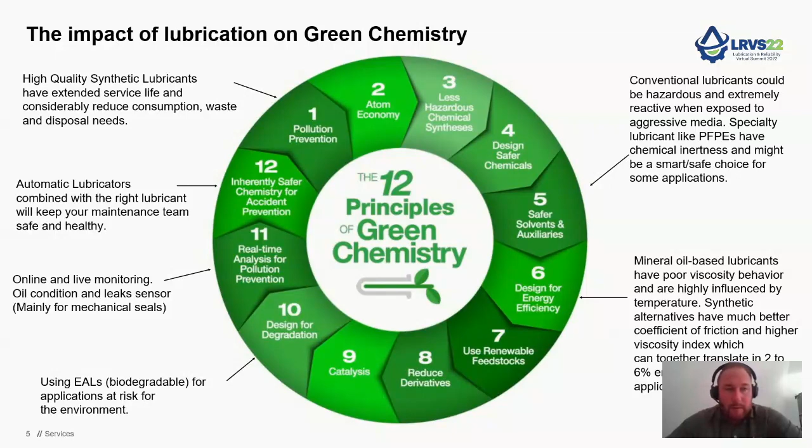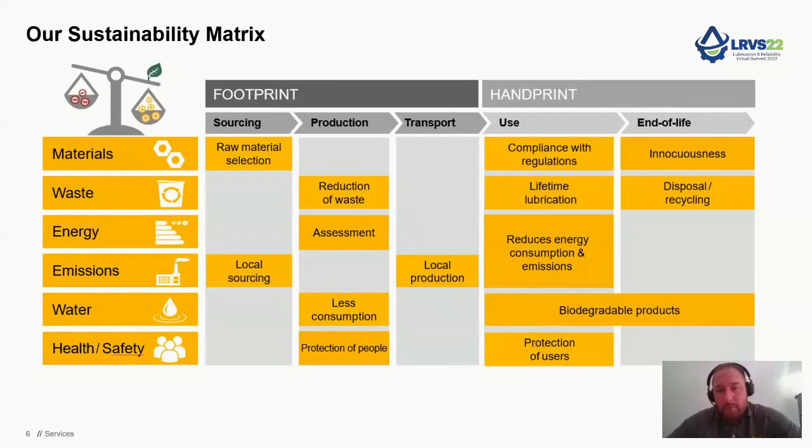So Kluber has its own sustainability matrix - what we can influence internally, like raw material selection. We try to buy mostly local to avoid any long transportation. We try to develop new products based on renewable raw material, and on our handprint, we definitely try to influence things on the customer side to push biodegradable products by reducing the consumption and emission of greenhouse gas.

So if we consider the automotive industry, we really see the automotive sector starting to do a big switch, and most of the OEMs, they don't even provide the car out of the dealership with mineral oil.

No car is using mineral oil anymore because of the legislation, and the emission standards are too severe, so they need synthetic oil in order to respect the strict standards for emission. That's why most cars right now are running 0W20 or 5W20, really light oils, but because of their high viscosity index and synthetic formulation, they keep the viscosity at high temperature, for example through traffic. So you have fluidity and pumpability at cold or during startup, but also higher performance and longer oil intervals. Before we were talking about 5,000, 7,000 kilometers, and now some cars recommend 40,000 kilometers. So it's definitely good for the environment, less oil changes. So why is the industrial sector still using a lot of mineral oil? That's the question we should ask.

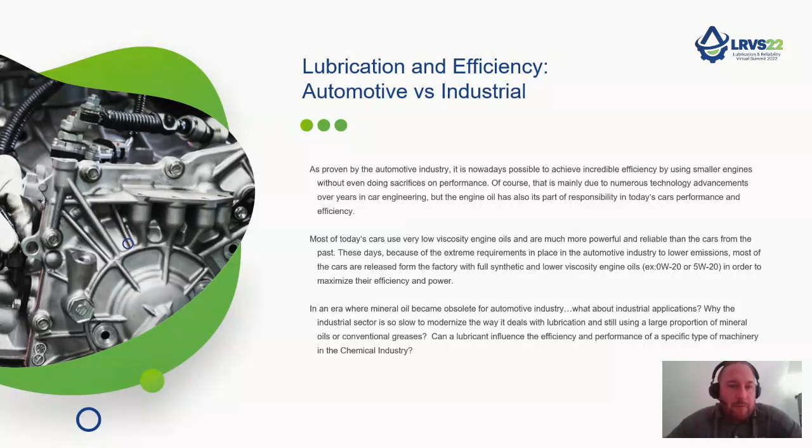It's not only about the base oil we use. At Kluber, we have different types of synthetic base oil, but it's also about the additive package, which is extremely important in the chemical industry, even more so, because sometimes the lubricant can interfere with the gas stream, for example if it's a gas compressor, or attack the downstream catalyst.

At Kluber Lubrication, we have over 120 test rigs just in Munich. We have other tribology departments and R&D around the world across our 14 production facilities, and we do a lot of research about the science of friction and different additive packages.

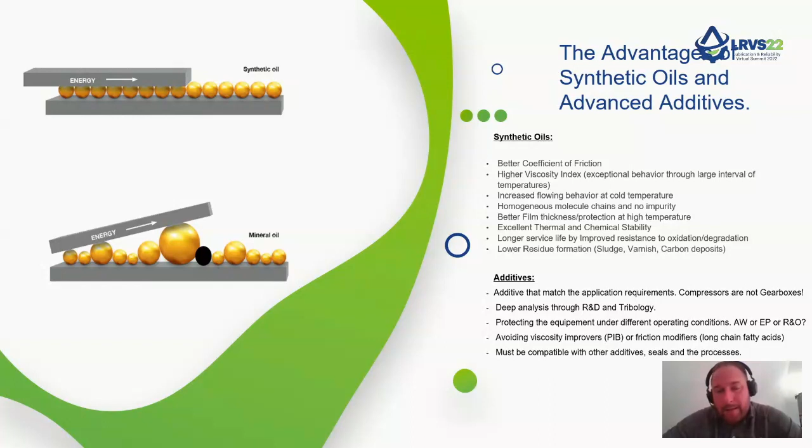We also have a lot of people using long chain fatty acids, called friction modifiers. They can replace extreme pressure or anti-wear additives, but they never have the same performance and stability over time.

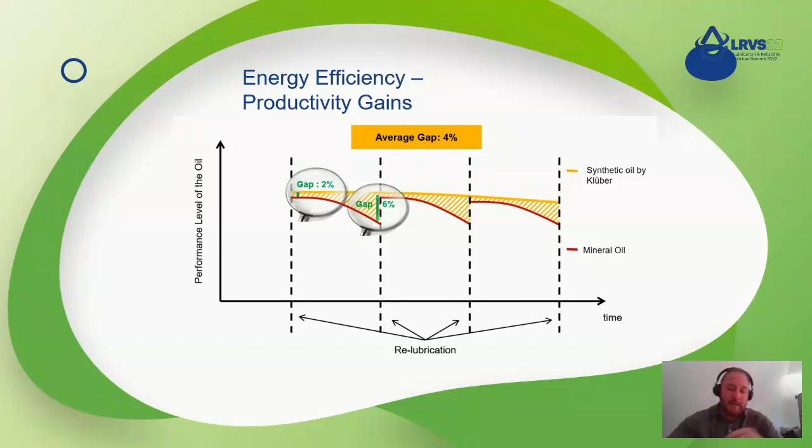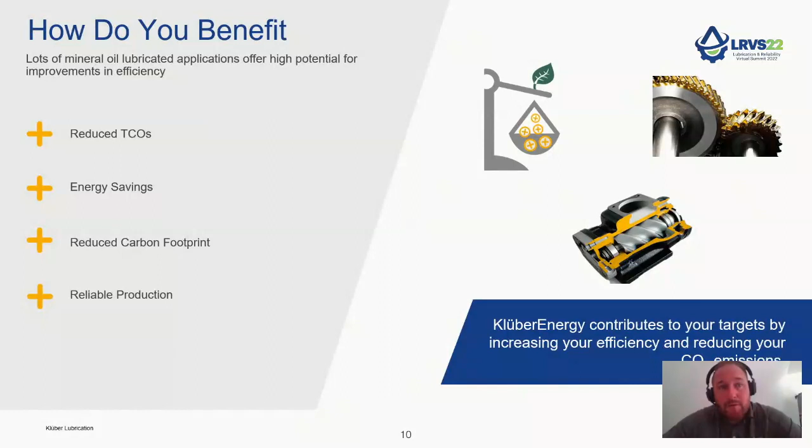This is why when we go to the customer, we do energy monitoring, and for most applications like gearboxes, compressors, and hydraulic systems, we see that we are on average around 4 to 5%. So these applications I just mentioned have really good potential for improvement if they currently run with mineral oil.

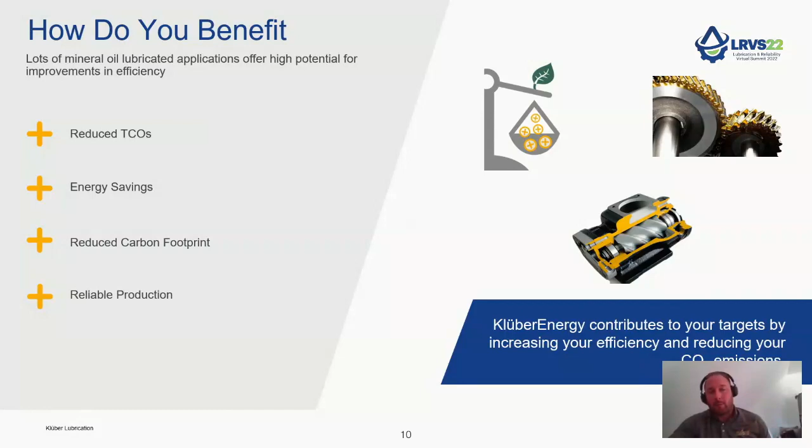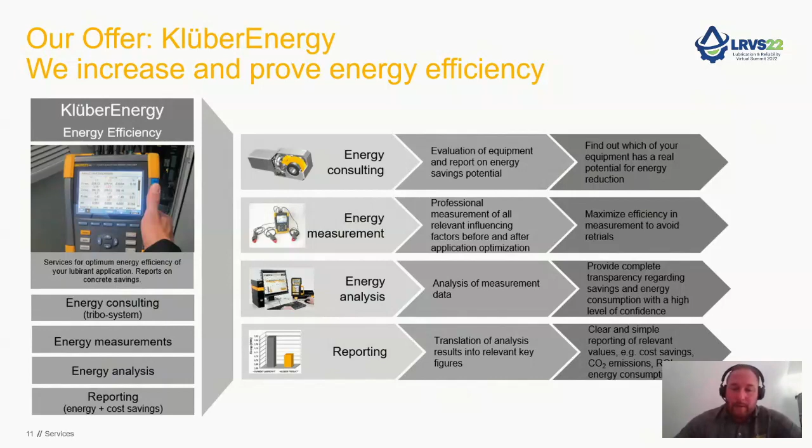So basically, we establish the baseline with the mineral oil running in there. Then we do the retrofit. Sometimes with oil analysis, it's really important. We see if there's varnish in the equipment, if it's dirty, because most likely people using mineral oil push them to the extreme limit, causing sludge, varnish, carbon deposit in the equipment, and that is affecting the efficiency. So if we see that there was this issue with this equipment, then we have a product to clean the equipment in operation before the switch over to the synthetic.

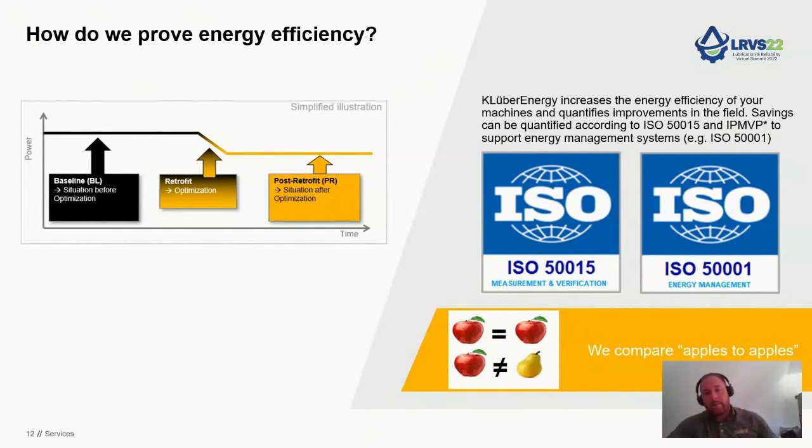So after we do the switch over to the synthetic, we still monitor all the parameters, and we compare what was before. Extremely important to monitor the right value when you do an energy efficiency project, since we cannot monitor energy saving on a process, so that's why we take the measurement at the motor, and also we need to monitor the process. If there's a control room, important to know about the production rate, for example, tons per hour, the estimated load, the material size and hardness.

Like, for example, if it's in a mine, if a crusher, depending on the place that the ore comes from in the mine, it could also influence the energy consumption, right? So, of course, the temperature, the ambient temperature, the temperature of the component, and the temperature of the oil, and also the oil level. So all these are influencing our energy efficiency project.

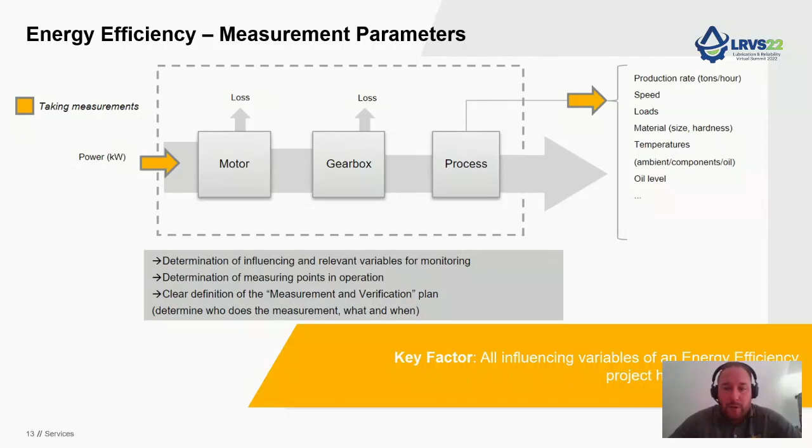So, for example, if we talk about some success story we have in the chemical industry, a lot of chemical companies cool down the process, cool down a lot of processed water. In that case we replaced normal extreme pressure mineral oil. The power was 56 kilowatt per gearbox. And we changed it for a Klübersynth GH 6-320, which is a polyalkyl glycol.

Of course, with the polyalkyl glycol, we need to make sure that there's no paint, or if there's paint inside the gearbox, it must be a two-component paint, like epoxy. We need also to certify the seals compatibility. Depending on the synthetic gear oil, we need to check it is compatible. But glad that we are owned by the Freudenberg Group, because Freudenberg core business is sealing technology. So Freudenberg Sealing Technology, our parent company, is definitely helping us in that regard, because we developed what's called Lubin Seal. It's a program that we certify, and all our products are tested with various elastomers.

So in that case, the result was 4.9% energy saving. In a cooling tower, the process is quite steady, always the same speed, always the same load. And this is why this application is one of our most successful in the energy saving program. So that was translating into 39,000 cost saving per year on the electricity side. Even if the PAG, the polyalkyl glycol, was much higher in price, the payback in this case was only 3 months.

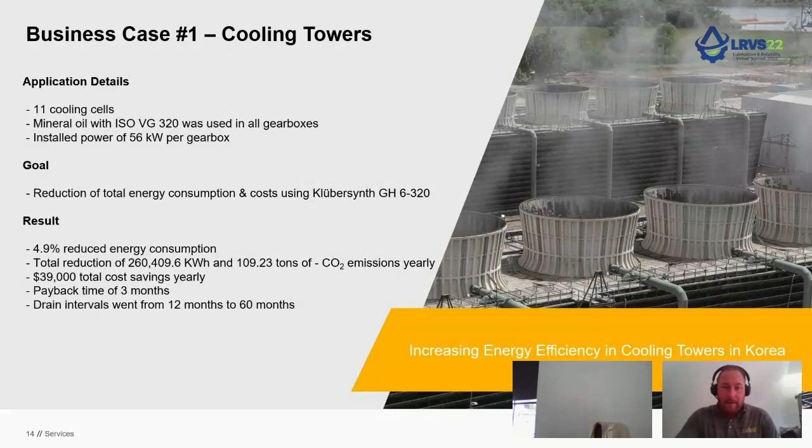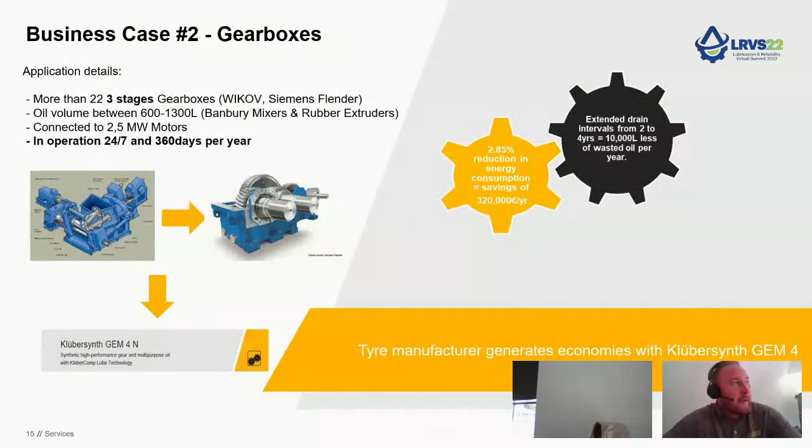And the drain interval went from 12 to 60 months. And this is not even included in the 3-month payback, because at this time, we had no clue how long the production. So the 60 months are an extra saving, and also better for the waste generation at that site. Another application, Banbury mixers in the tire industry, are extremely severe applications.

So at that facility, 22 three-stage gearboxes, the oil sump was between 600, depending on the size of the gearbox, to 1,300. It was mostly Banbury mixers and rubber extruders. They were all connected to a 2.5 megawatt motor, each of them. And the application is 24/7, 360 days per year. They really barely have shutdowns at that facility.

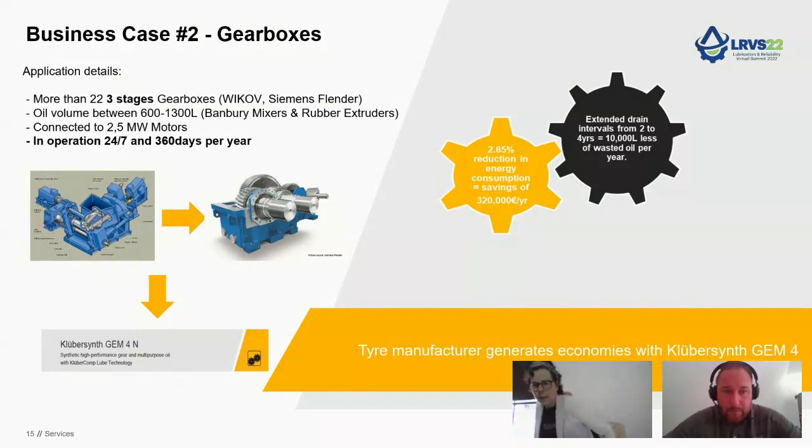So that saving was with one of our PAO base oils, Klübersynth GEM 4, and the result was 2.85%. But on such large equipment, this small percentage represents 320,000 euro per year. The drain interval went from every 2 years to every 4 years, so 10,000 liters less wasted oil per year. And we replicated that in many, many tire plants.

Another application is the air compressor. Not all air compressors are suitable; piston reciprocating compressors are not a good candidate, because of their conception, their operating mode. It's not a good application. But on the other hand, screw compressors are excellent. They run with mineral oil, so switching generates interesting savings.

So in that compressor, 75 kilowatt, 30 liter of volume. So we switched to a PAO and mix of ester, Kluber Summit SH46. The energy saving was 3.4%, and the service interval they could double. So that was a total reduction of 46 megawatt hour and 11,690 kilogram of CO2 emission yearly. The total saving per year, 6,258, and the payback time was less than 2 months.

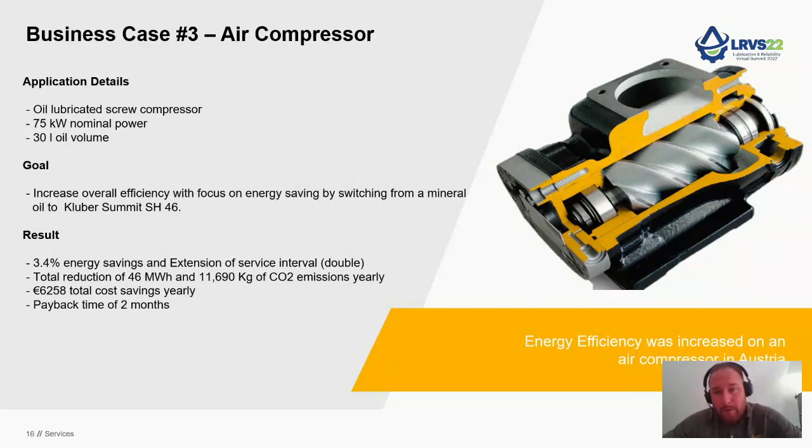So another business case, as I told you, some equipment running with mineral are dirty. You can only notice that once you do analysis or you look inside, like with a small camera or flashlight. And we developed a product called Varnasolv. And if we, for a specialty lubricant, see that it's dirty, we usually recommend the Varnasolv.

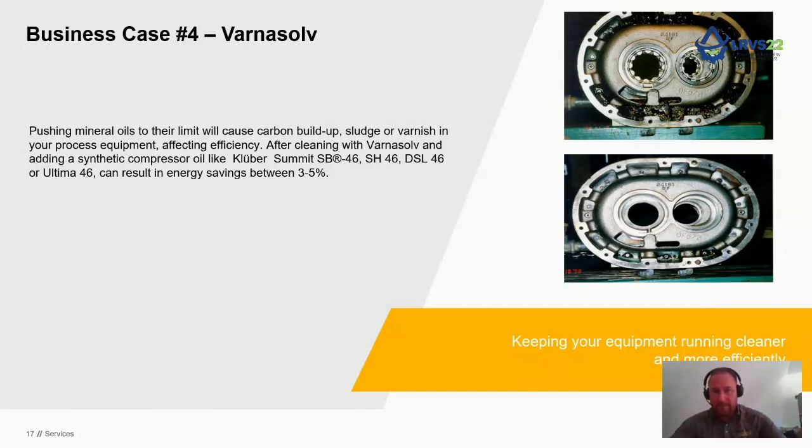So we drain 10%, 15% of the oil in place, replace it by the same quantity of Varnasolv, run between 1 day to sometimes 5 days, depending on how dirty the equipment is. Then we flush, completely clean and ready to be filled with the high performance specialty lubricant.

So I always face this question where people ask me, well, synthetics are synthetic, right? So I already have a supplier, why would I go with you guys? And the reason is that synthetics are not synthetic. Basically, there's a lot out there, and this is just a hypothetical scenario, but a lot of companies, in order to bring the cost down of their recipe, like large oil companies, they are producing

the mineral base oil by producing diesel. So they end up with a lot of mineral oil. What they do in their synthetic formula is cut with some of the mineral to bring the cost down. And some are also starting with low viscosity because the synthetic base oils, most likely the PAO, the MPAOs, the PAGs, they are more expensive than the mineral oil.

But as soon as you increase the viscosity and you want higher viscosity base oil, it's exponential. So when you do a gear oil, for example, if you want a 320 gear oil, starting with a pure PAO at 320 will be much more, so they buy a PAO around 100 centistoke, and then add polyisobutylene, those viscosity improvers. So on the technical data sheet, you cannot even notice that.

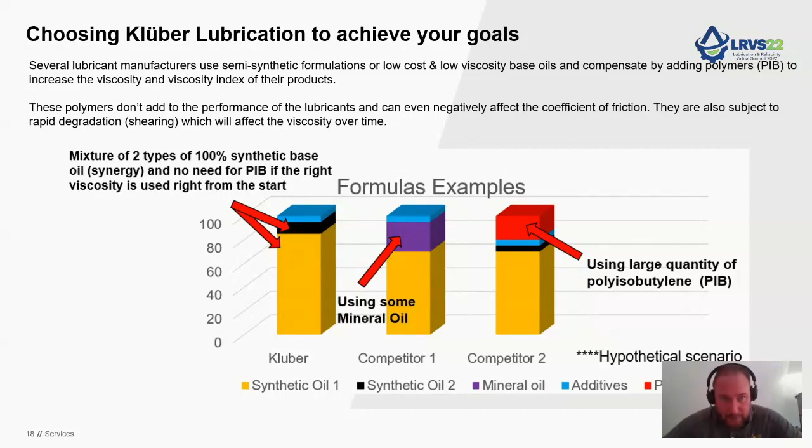PIB would most of the time have a better viscosity index and better stats, but what you don't see is their degradation over time, their oxidation and the performance, the stability over time. So definitely testing is extremely important.

So in summary, Klüber EnergyFit. So we start with a lube survey. We identify those applications that are suitable for the project, and then we are working hand in hand with the customer to make sure that we have all the oil monitoring, and we do estimates, we have calculations, we have so much experience, we have over 350 successful cases on different types of equipment.

So most likely we have some numbers, for example, Ingersoll Rand, Sullair, or Atlas Copco air compressors, and we can give some estimate, do the monitoring, and we can also provide a certificate according to the ISO system, the local authority, and have those credits for carbon tax, for example. So we have the knowledge about seal compatibility, energy measurement, and